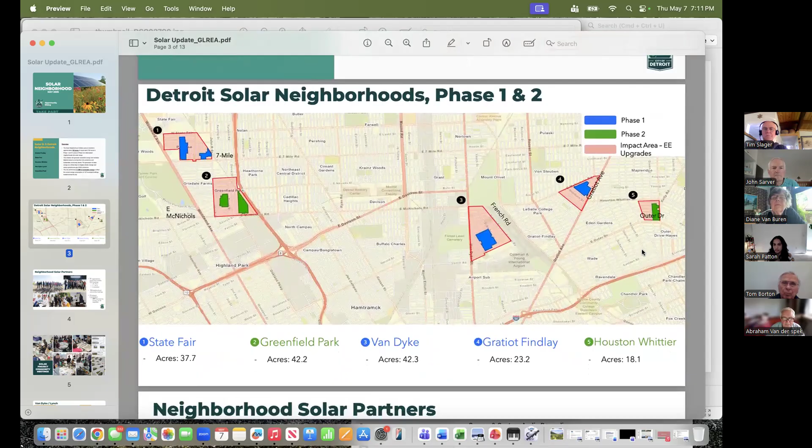Okay, Diane, can you move to that map, please? Thank you. So this is an overview of where all these neighborhoods are landing across Detroit. It's really fun to see it this way. The blue is phase 1 because we did this in 2 phases, and then the green is phase 2. Phase 1 happened in July 2024, and then phase 2 happened January 2025.

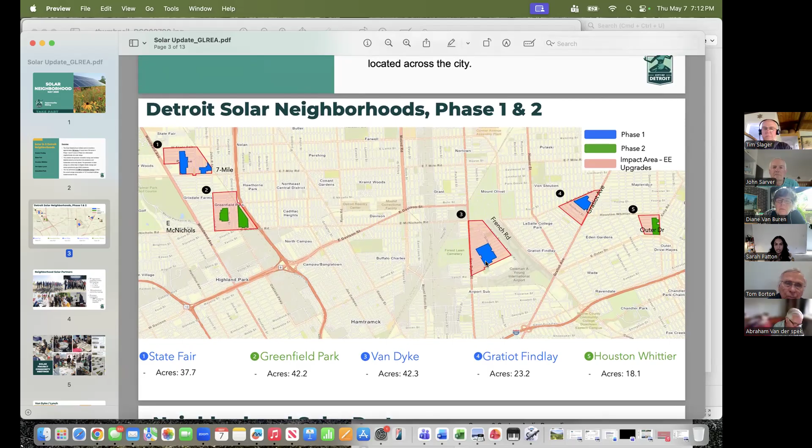How this map reads is the blue/green areas are where the solar fields will actually be. The red boundary is the surrounding neighborhoods that actually received energy efficiency upgrades. Because the generation is going towards city buildings, we really needed a way to give back to the neighborhoods, the people who are going to be around the areas. So as part of the initiative, we did home energy efficiency upgrades to all the surrounding houses within that red boundary. They got between 15 and 25,000 per home to upgrade their house. I'll go into detail a bit later on that.

So during this process, we had to engage the community, we had to engage our local organizations, we had to really drive home what this project was doing, how we were going to go about it. And as Diane said, we had to gain the trust of the neighborhoods. So we had 21 organizations join us, NSP's Neighborhood Solar Partners, and that is where Diane comes in.

She worked very closely with us on 2 neighborhoods. Of those 21, 10 of them were tier 1, so they just kind of helped us with messaging and getting out there. 5 of them were tier 2, so those were the partners more hands-on with the neighborhood.

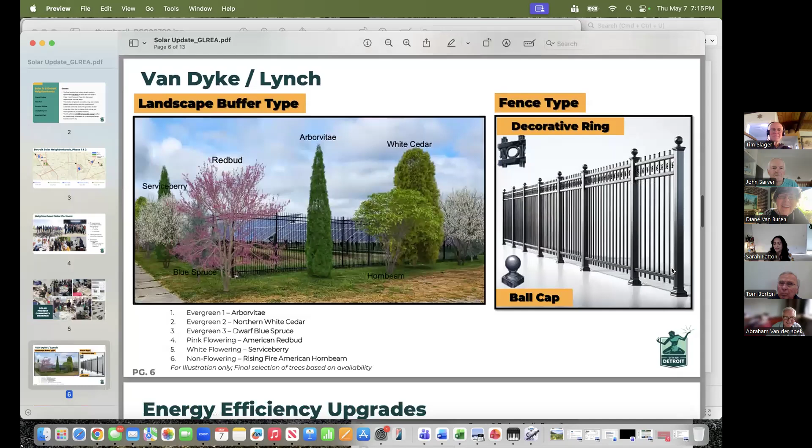And everyone ate well too. And everyone did eat well too. Yes, they were work time or after work time meetings, so we had made sure to have dinner.

And this is an example of what the neighborhood in Van Dyke Lynch picked. So they wanted the decorative ring at the top. They wanted a ball cap on top of the fence. These are the specific trees they wanted. That's how detailed it got. They picked the exact trees they wanted to see and even the order they wanted to see it in.

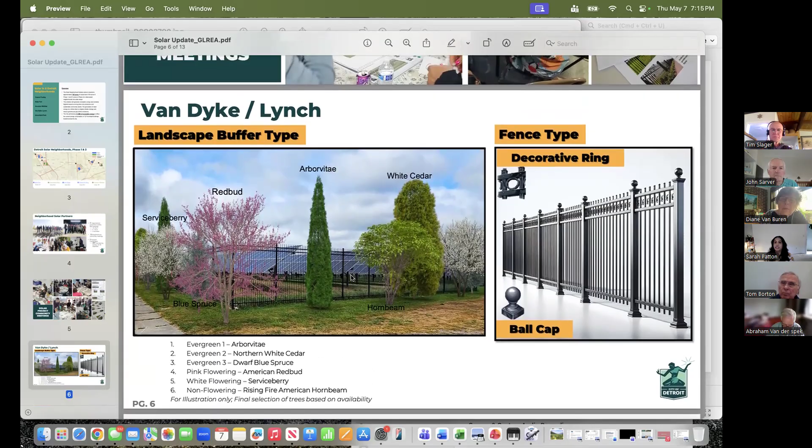So this is what the neighbors picked in Van Dyke. And I only put 1 image in here because it gets a little repetitive, but each neighborhood picked their own variation of this. So they're all slightly different, but the idea is the same, the same kind of fencing, but one may not have the decorative fence or they may not have a ball cap.

So this is what Van Dyke looks like, and in a few months, towards the end of the summer, it's going to look a variation of this. It's not going to be in full bloom like this because it's all going to be new plantings of trees and bushes, but give it a couple of years and it'll be full grown.

One other thing that they were able to select, and this is something that will be coming up, not in this discussion, but we'll host another one when this project comes up, and that was what type of interior, what did they want to see inside the fence? Sarah, I hope it's okay that I butt in here.

But what was important was the lesson learned from the first DTE installation in Detroit that was not a community engagement process. And then it just ended up being mowed grass, more or less. And the residents just felt isolated from that site, like this giant thing was put in the middle of their neighborhood. And what do we do? So it was really critical that the neighbors had a voice in what they wanted to look at.

In the Van Dyke Lynch neighborhood, which will be called a different name shortly by DTE, they wanted a meadow inside. So they had options: do you want gravel, do you want just mowed lawn, do you want agrivoltaics? We did one of our solar talks last year on agrivoltaics. This neighborhood really just wanted the meadow and they liked the look of the wildflowers and whatnot. Recognizing that meadow doesn't look like that year round, there will be border plantings as well around the edges.

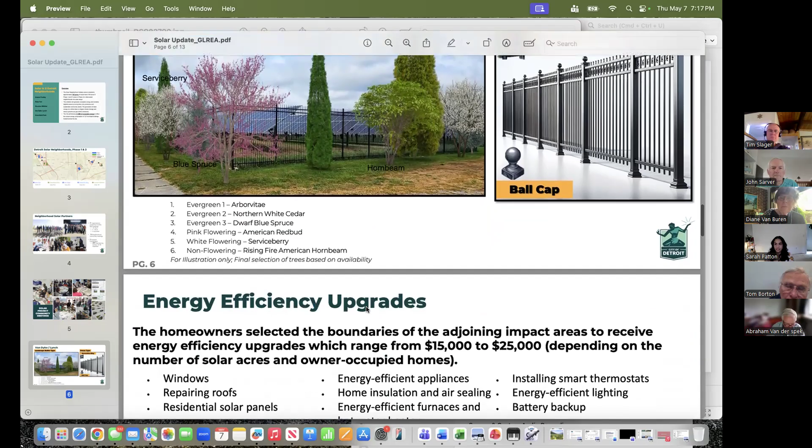I do want to stress that we learned a lot of lessons from O'Shea Solar Park. While the residents did receive some home upgrades, it wasn't nearly the way we touched them for these five neighborhoods. We made sure it was community driven in these neighborhoods, which is why they had so much of a say in what it looked like.

They also had these energy efficiency upgrades, which I mentioned earlier. It's 15 to 25,000 dollars, each neighborhood has an allocated amount. How it was determined was depending on how big the array in that neighborhood was, plus how many homeowners. It was just like a formula of how much.

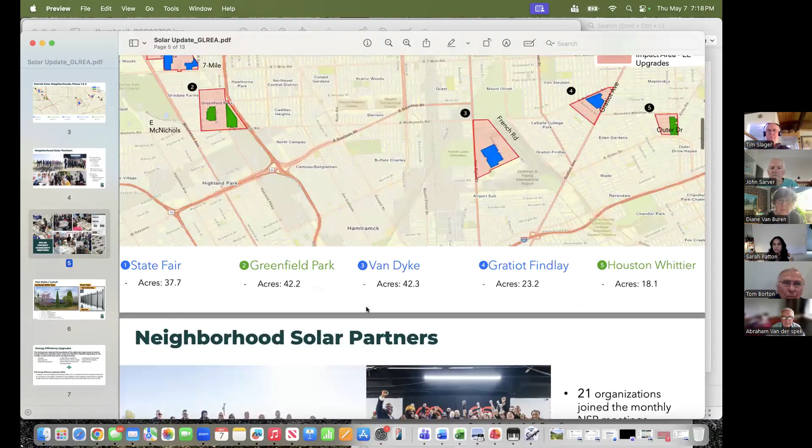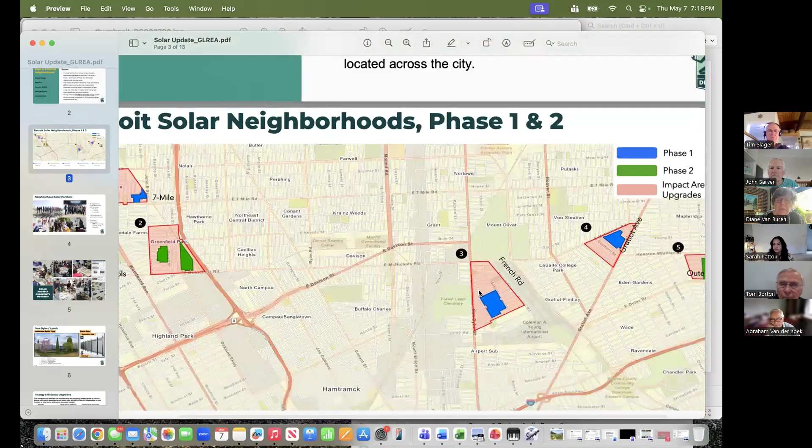As you can see, for Van Dyke, this is about 40 acres, and the residents in the pink area - 65 surrounding homeowners. So that neighborhood specifically received 15,000 in upgrades.

The process we did was we initially did a pre-screening with them. It was just a phone call to get their information, see what their concerns in that house was, collect data we needed. We needed to make sure they were owner occupied because that was a huge thing - no landlords were going to get these benefits. You had to own and occupy your house, and you had to have lived in it by December 2023, and that's all you need to qualify. You just had to live in the house.

We then did an inspection of the house. The developers had their subcontractors go out. It was about a 3-hour inspection where they looked at every corner of the house and then provided a report of where they think that homeowner can see energy efficiencies, and of course any health and safety measures that may have been concerning.

So this is just a list of their options. However, it really is homeowner driven, so that homeowner got a heavy say in what they received, but they could have gotten windows, roof repairs or replacements, solar panels, which I will show you. We did have one resident whose house was solar ready, so they were able to get panels, appliances, furnace, AC, hot water heaters, CO detectors - anything that was going to make the house more comfortable to live in, and obviously lessen their energy burden.

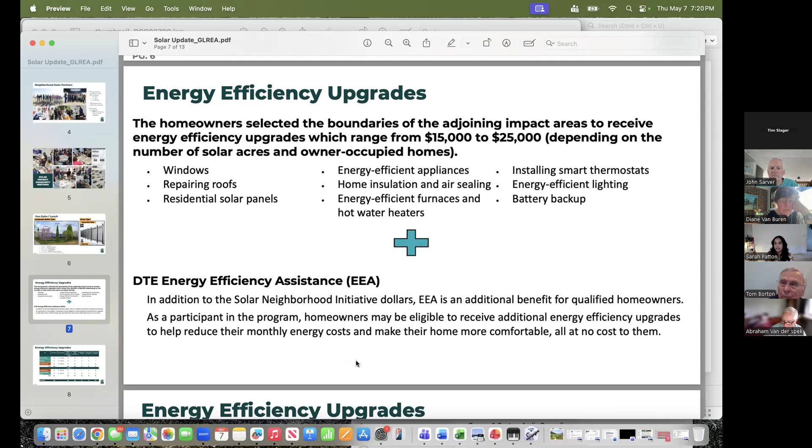We coupled this amazingly - DTE was a great partner with DTE's EEA program. So above the 15 to 25,000, the homeowners also received EEA, and that was just whatever additional benefit DTE could provide.

This is a snapshot of where we were about a week ago. As you can see, we have 209 total homeowners. That's the breakdown of what each neighborhood received: Gratiot Findlay about 17,000, State Fair and Greenfield Park is 25,000, and Van Dyke and Houston Whittier is 15,000 each. So each home received that dollar amount, but in addition to that, they also received EEA dollars.

As of last week, we've actually completed about 100 homes - I think it's a few more as of today - but that very last column shows how many homes are completed of the 209. About 85 are kind of in progress right now. The homeowner has either signed off on what scope of work they want, so what upgrades they're receiving, or they are actively in construction. The remainder is just us collecting final paperwork and getting on their schedules for when we can do their home assessment.

So pretty soon this is going to be a completed list, and all these homes would have seen great upgrades in their house. We've seen so many new roofs, so many new furnaces and ACs. We've gotten a lot of testaments of how their house is now so much more comfortable to live in.

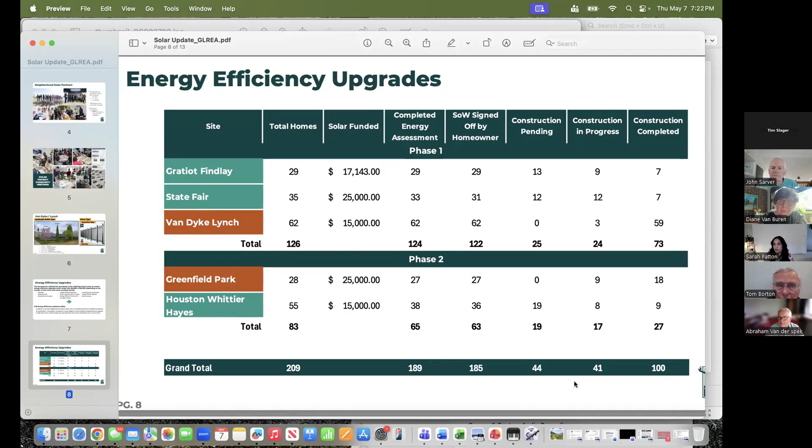We had one instance of a resident who received a CO detector - there's actually an article out there if you want to look it up. But a few days after she received it, it started going off, and the fire department came to inspect the house. They told her had she gone to sleep that night, her and the kids in the house may not have woken up that day. If it wasn't for that CO detector getting put into the house, who knows how that story would have ended. But gladly they did get out and they were able to fix that problem. That's just one of many stories we've heard that we are so happy to have been able to make that difference in their lives.

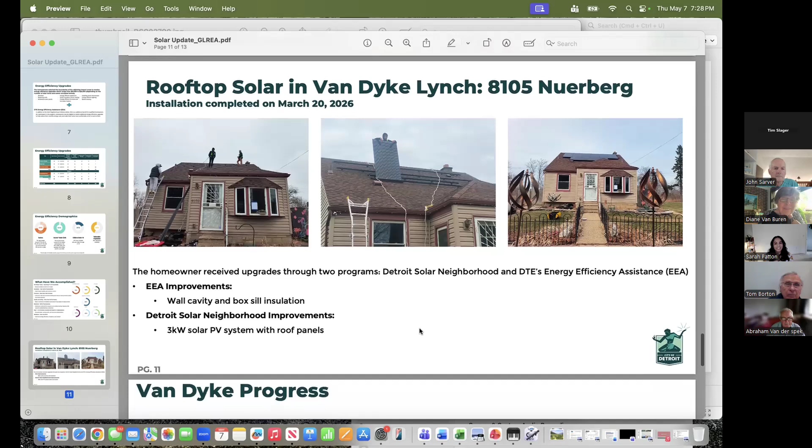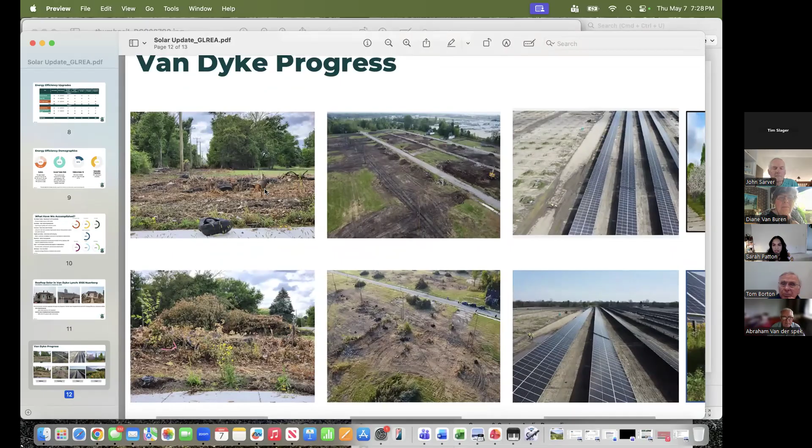Wow, isn't this something? I'm going to blow up the befores. That was a great photo you showed before. These are just additional images of what this land looked like. It was just nothing, there was dumping on it, it was overgrown. This is a sidewalk view of what you would see walking by. So this was before we purchased the land. These were the neighborhoods looking like.

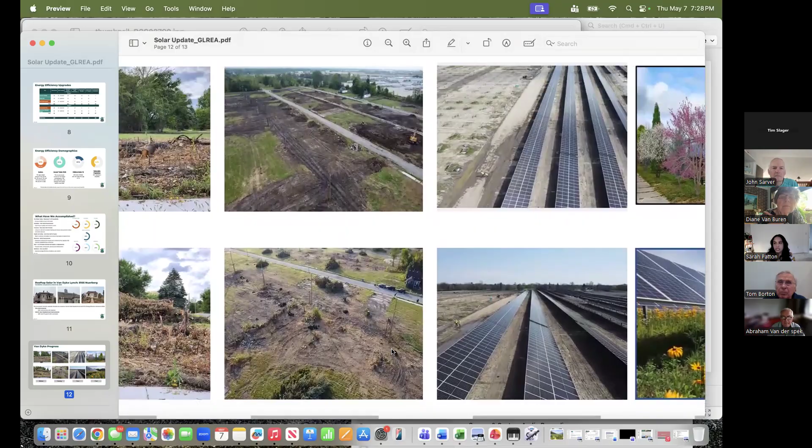Then there was a during, when of us clearing the land. The city at this point bought the homes, demolished them, and DTE started clearing the land. That third column is what it looked like as of last week. So it's coming along fantastically. You see panels in the ground. Pretty soon you're going to see that meadow pictured on the very right hand side.

But just to get a scale, okay - here's 2 guys, right, and then here's a house over here. So this extends for several city blocks both ways.

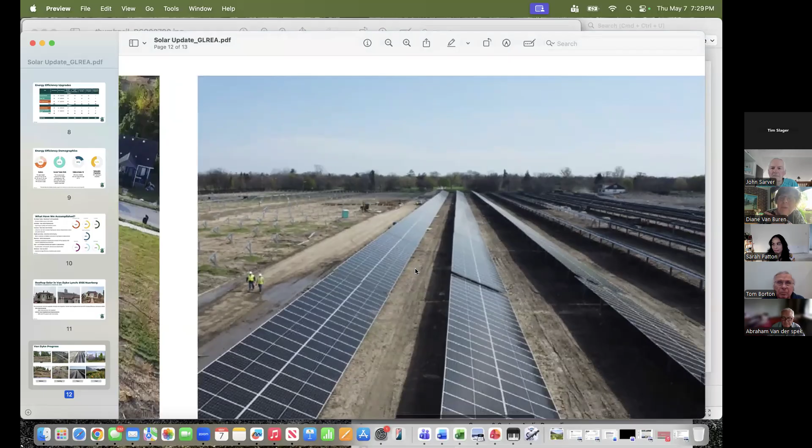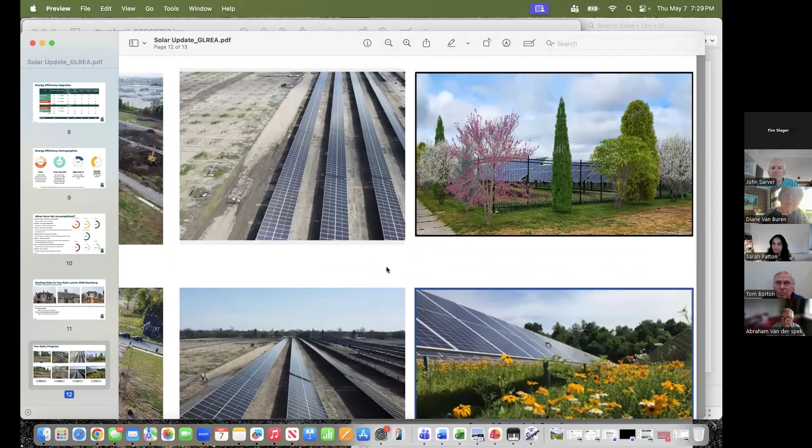And Terrence and Brandon are going to be bringing us up to speed on that. And then here we are with the meadows eventually. I think we're going to talk to them about how to group the red buds together and make groupings, but we'll get there. And then a beautiful site.

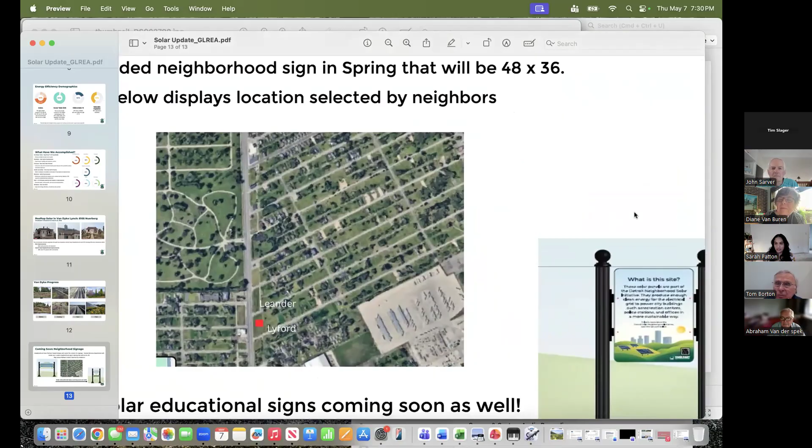One additional piece we found some money for that's really exciting is neighborhood signage. There's going to be 2 signs. The first sign - Van Dyke, for instance, DTE refers to as Castle Park - but it's going to be a solar neighborhood sign saying this is a solar neighborhood, and it's going to say the neighborhood name, so Van Dyke for instance. We're also going to have an educational sign on what solar is, explaining as people are walking on the sidewalk what they're looking at through the fence. That middle picture - I wish there was better pixelation on it - is actually where Van Dyke specifically will be located.

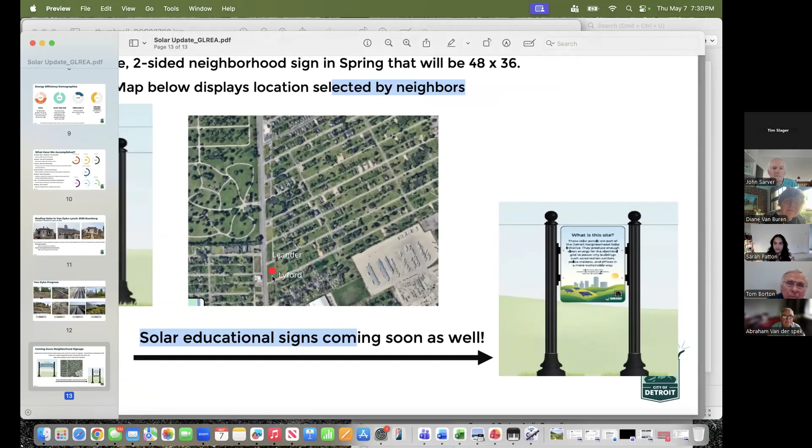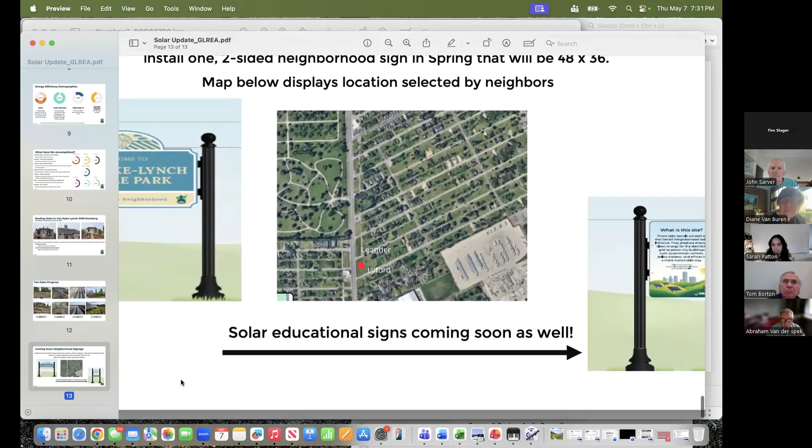And again, this was heavily neighborhood driven. This is where the neighbors in Van Dyke voted for these signs to go, off of Leander and Lyford, right in the middle there. Again, just right off the sidewalk, so anyone walking by can stop and see the sign and read the educational piece. We're hoping the city's going to be putting these in now that the weather's a little bit better, we should be putting it in soon. The other neighborhoods still have to vote on where they'd like the placement, but once they do, the signs in the other neighborhoods will go in shortly.

That's awesome, that's all I have to present. It's a lot of information, feel free to ask questions towards the end.

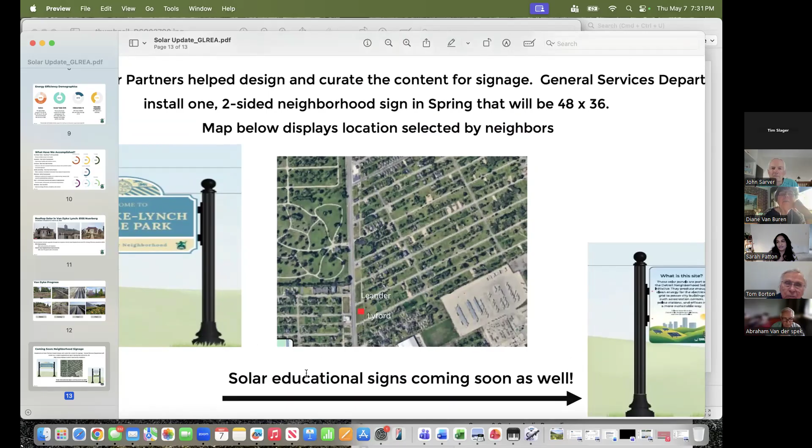Let's stop for a moment and see if there's any questions for Sarah directly now. Before we move on, I have a technical question. Hold on, I've got John Freeman's hand up. Oh wait, go ahead Marcia. Go ahead, oh thank you.

That was fascinating, but I have a lot of questions about how this is being financed. I don't know who owns the solar panels, what organization, that sort of thing.

I didn't catch what you said, I missed it. I'm sorry, that's a great question. I did not go into that much detail.

So how this is working is the city owns the land and the developers are leasing that land from us. So they actually own the solar panels.

How it's being financed: right now the developers are DTE and Lightstar Renewables. They were selected through an RFP process. The city put out an RFP two years ago to solar developers nationwide to select a developer who could come up with a financial structure on how to best make this work.

The city said, give us your best ideas. We're willing to lease, we're willing to outright purchase, you tell us what will work best. The city did select DTE and another company out of Boston, I believe Lightstar, that's doing the agrivoltaics.

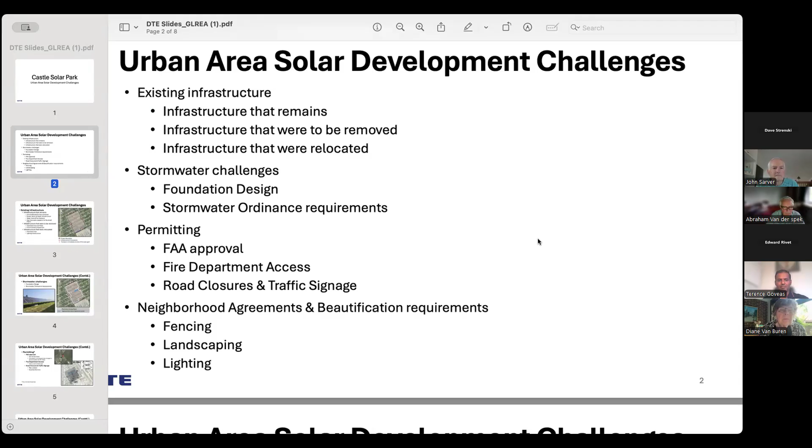So we can go to the next slide. Yeah, thank you, Dan. So in an urban site, compared to a greenfield development, the first big difference is that the project area is surrounded by and often interwoven with existing features and community uses.

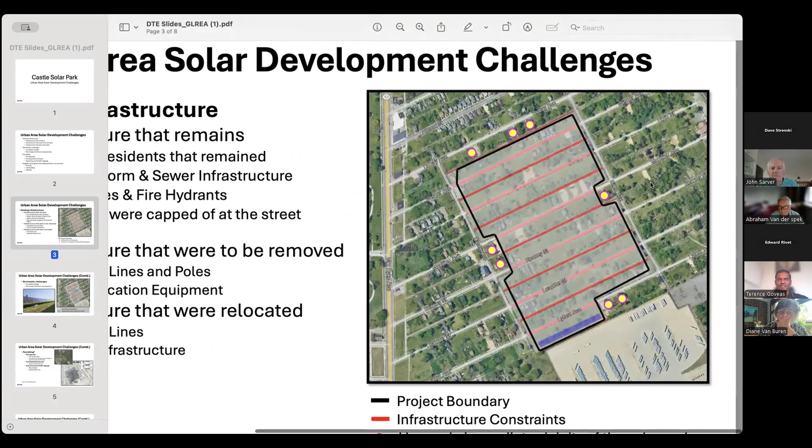The image you see here on the right-hand side is the project location. The black line shows the project boundary. To the east of the site is an airport. I should have thought about that before. On the west side, you'll see that main street is Van Dyke Lynch, and what Diane was pointing out earlier is Castle Avenue.

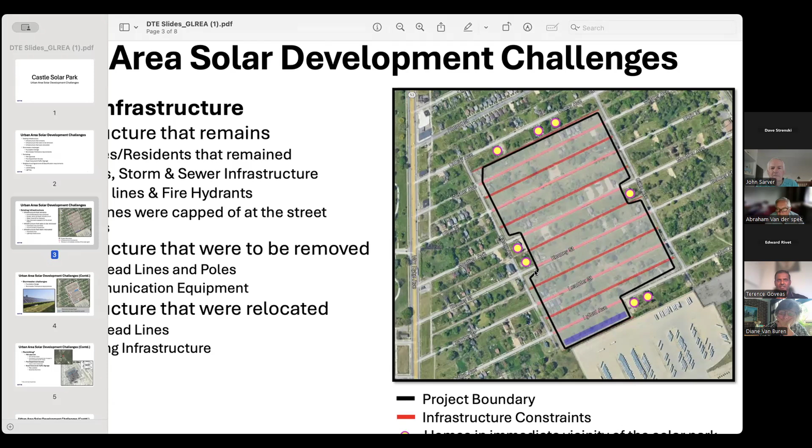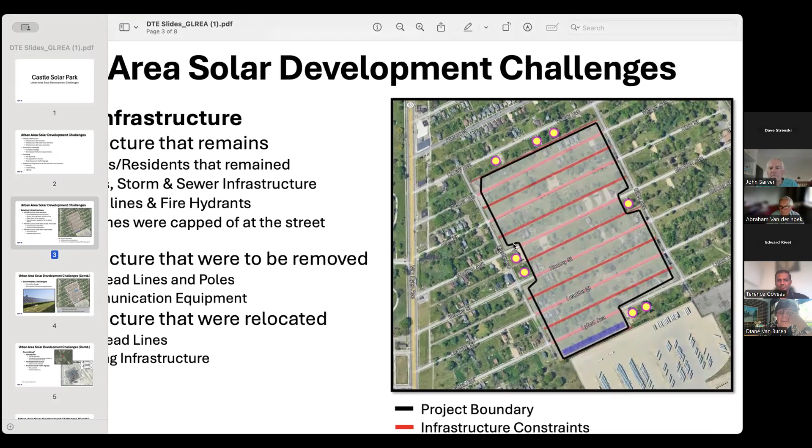So the first thing we did was look at the infrastructure and figure out what remains. Obviously we decided the roads had to remain. In addition to the homes, the stormwater and sewer infrastructure had to remain, and the water lines and fire hydrants had to remain.

Now, per our contract with the city, we were allowed inside the fence to build on top of the streets. They just had to be ballasted, so in case maintenance was required we'd be able to dismantle the system and do the required maintenance. But we decided against that, because when you look at the long-term feasibility, dismantling an operational power plant does not really work out quite well.

So the red lines that you see within the maps are essentially these stormwater lines and roads that we decided to stay out of.

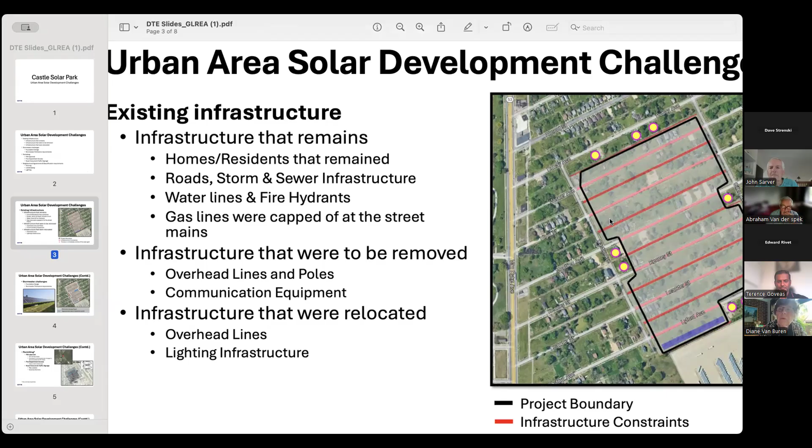And Terence, it should be pointed out quickly that DTE has a 35-year lease. So it could be that in 35 years this neighborhood is hopping, and it could be a housing development that happens at some point, or there could be another use. So the city, to save costs, chose not to have that amount of infrastructure removed. That's a very good point, Diane. Yes, so we decided that all of this infrastructure would stay in place.

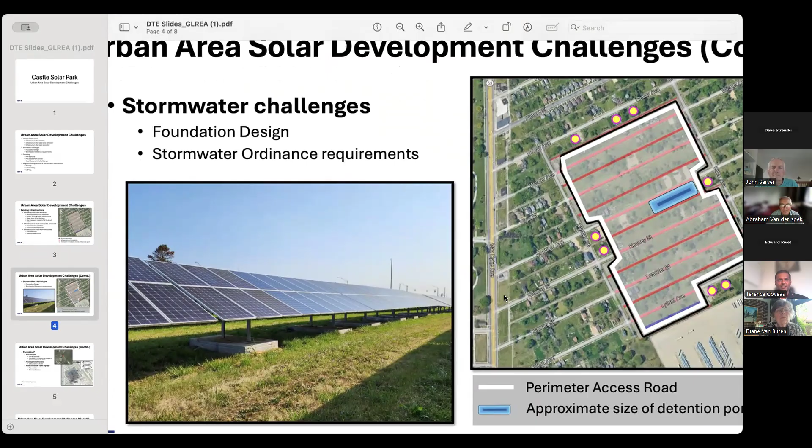Then we had to look at what would be removed: the overhead lines and poles. Some of these poles had communication equipment from either AT&T or Comcast connected to them. And just because the solar layout and the long-term operations couldn't coexist in case of a storm and things like that, there is a high risk that our panels are damaged. So we decided those need to go away.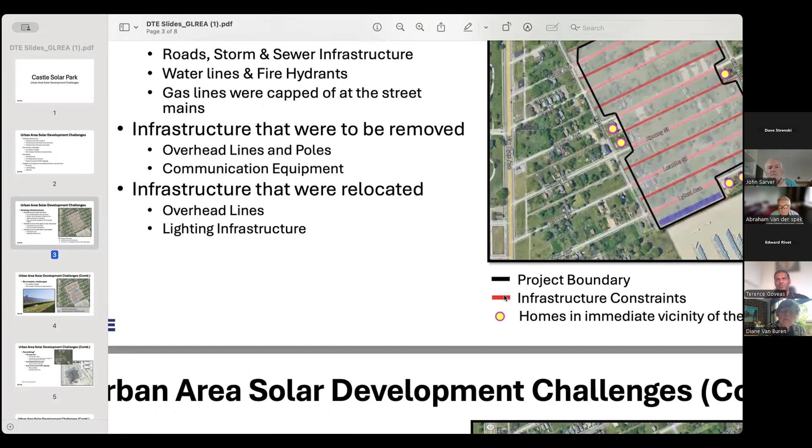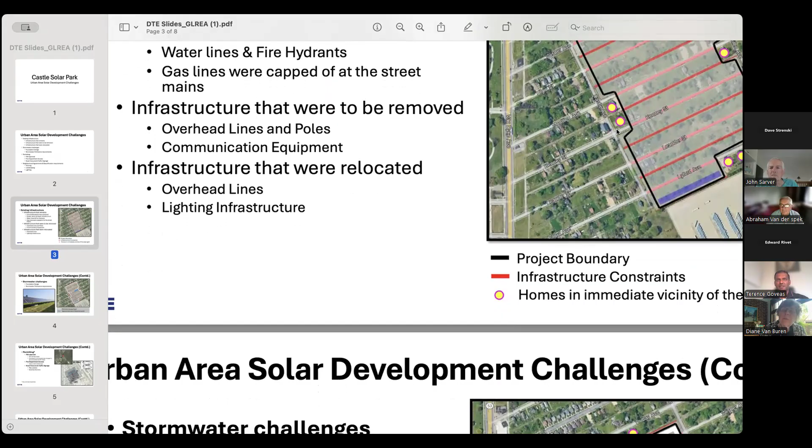And some overhead lines were relocated to the boundary, because you still have to power that one home on Gilboa Avenue. So some of the power lines were put along the perimeter on the north and east side. And I believe these houses chose to stay - they could have sold, and the yellow dots represent the houses that decided to stay.

So we would have liked to have a straight line fence there, but we had to build around that. Once you understand what the fixed constraints are, what you can't move, what you must move, and what you must protect, then you go on to the next big driver, which was the water and the stormwater challenges.

Stormwater directly influences the foundation design and the overall civil layout. For all practical purposes, a solar array is technically considered a pervious surface because water just runs off and there is a gap between the modules, so any rainwater can percolate directly to the ground. We had decided to go with a ballasted system.

While going through our designs and looking at the stormwater ordinance, we realized the amount of concrete blocks we were having meant the total area was beyond what the ordinance would allow without implementing mitigation measures. The ordinance is written such that if you exceed a certain acreage limit of concrete, you have to implement certain measures.

One of the options was to implement a detention pond. As you can see on the screen, the blue rectangle is the size of the detention pond that would be required for about 40 acres worth of developed area. That would mean we'd lose generation capacity and it would also mean additional civil work.

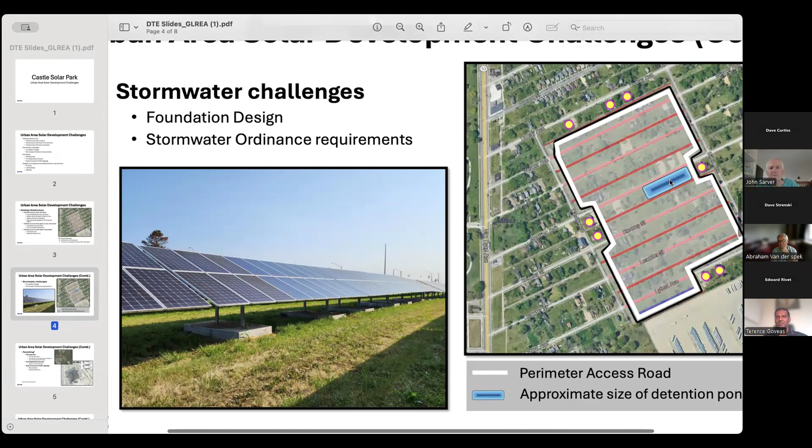We really didn't want to disturb too much of the land around there, and it would have meant additional costs too. Compared to a greenfield project, when you work within city limits, you don't really get the economies of scale. So taking all that into account, we decided to move away from ballasted foundations and instead went to a pile-driven foundation.

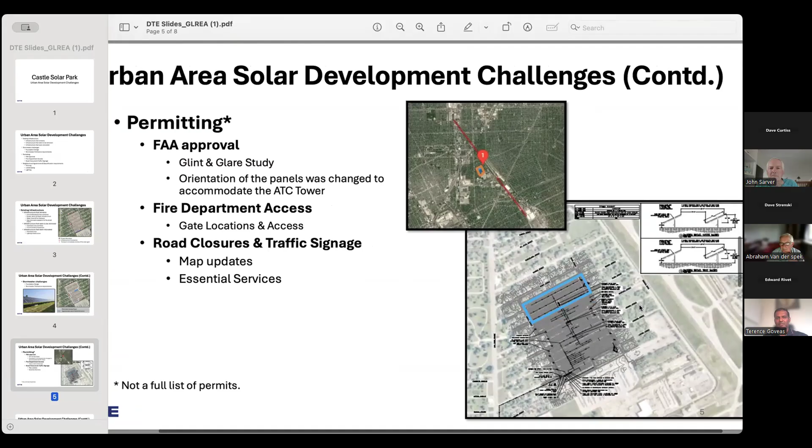Once the civil concept is workable, the next set of constraints really come from approvals, safety, access, and operating within the city limits. It so happened that we have an airport right next to the project site, so once we developed the initial design, we coordinated with the airport development team.

A glint and glare study was performed. This study incorporates technical details from the design, like the type of panels, the angles, the orientation, and it also looks at the flight glide path and the air traffic control location. In this case, it turned out there was a slight impact to the air traffic control tower.

Based on the report, the top one-third of the array really was the problem area, so we had to change the orientation of those panels to face southwest. Most of the panels here are facing southeast, so just the northern side of those we had to change to southwest to mitigate those glare concerns.

Once that was figured out, we went to the PPR, preliminary plan review, with the city, and also got additional feedback from all of the departments.

The fire department gave us input into where the gate locations should be, in case of an emergency response. In addition, the city departments developed road closure maps and traffic signage that had to go with it, because even though this was in a corner, we were essentially creating dead ends at certain places, or we had to reroute traffic.

There were detour signs that needed to be placed along the project boundary, and Google Maps had to be updated for essential services like emergency response or trash pickup. Those had to be developed as well, so we worked hand in hand with the city to go through this.

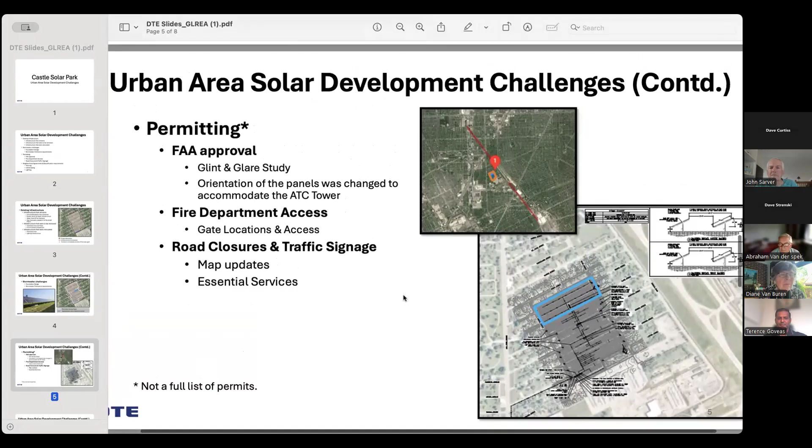Now, that doesn't make the task easy. Next slide. Yes, yep, yeah, but yeah, I would say we had a great time working with the city. Everybody was helpful, giving us useful suggestions on how to do things. It was an iterative process, and it was a pleasure working with all the departments there.

After you clear all these approvals and access requirements, the main layer really is the community expectations, which is what you see here—you've probably seen this slide for the third time now. This essentially captures the good neighbor requirements under beautification. In urban solar, aesthetics can be a core requirement, not just a nice to have, because the project exists in daily view of the residents. That's what Diane and Sarah pointed out earlier about O'Shea—they are looking at this site every morning as they wake up, and every evening before they go to bed.

So we really worked with these communities to understand what their requirements and expectations were. It was pointed out earlier, they chose the type of fence with the ball top post caps and O-rings, and the type of trees.

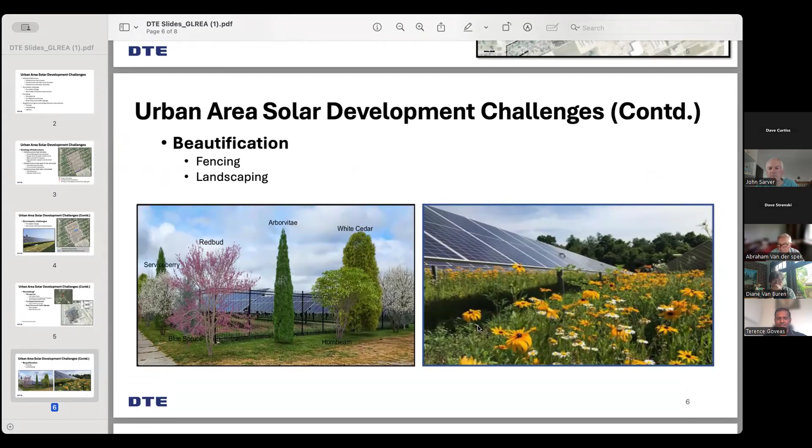On the right hand side, the image is essentially a rendering, a visual that reinforces the intent. The plantings are all planned. There's a mix, they wanted a meadow, a manicured meadow, so these seed mixes include Golden Alexander, Black-eyed Susan, Mountain Mint, and others. That was one of the key requirements.

So with that, I'll hand it over to Brandon, and he can walk you through the construction challenges. Thank you, Terence, great job. My name's Brandon Francis, I'm the project manager for the construction aspect of this. Once we get through design, Terence hands it off to me, and we take it from there.

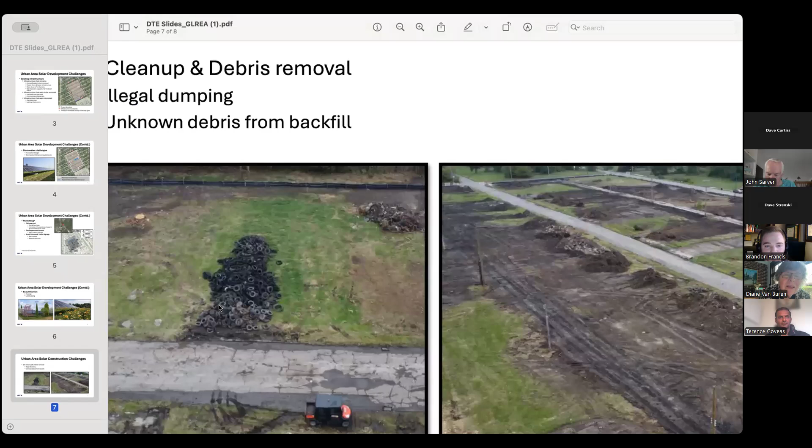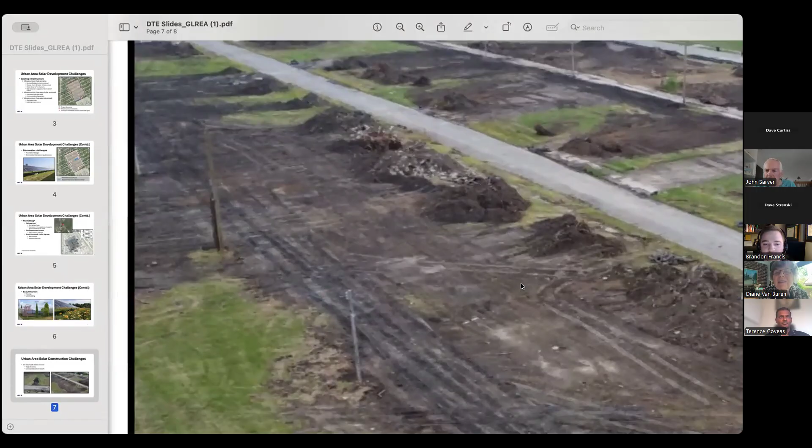We began construction in January with a lot of our pile installation. We actually started before that with tree clearing. Once we cleared a lot of this area, there was a lot of debris left, tires and all. There was concrete, asphalt, trash, lots of tires and things like that piled up and assembled. Cleaning the site was a pretty large task, but we were ultimately able to clean it all up and move on from that.

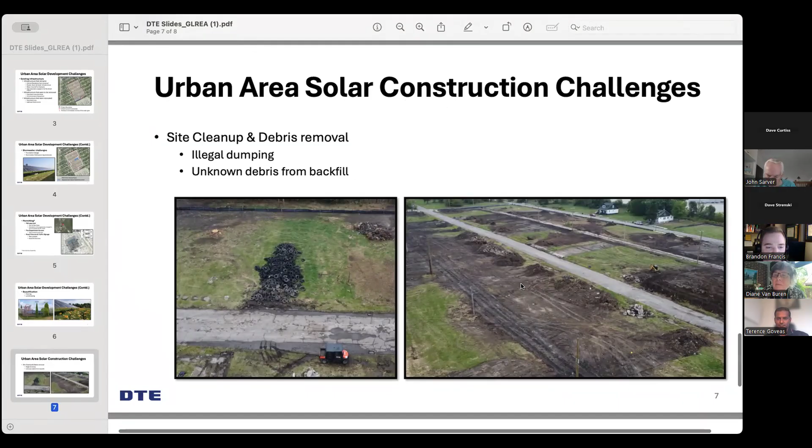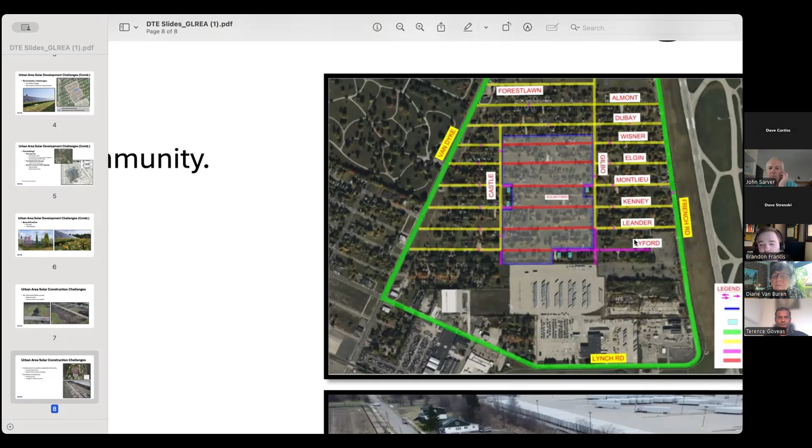So some of the construction challenges we're working through: we had a transportation plan to limit disturbance to the residents that chose to remain and the folks in the vicinity around the project. We had this green line here, which is Lynch Road. We had folks come up and around French Road, then through some side streets on the northeast side of the project to get into the job, especially all of our trucking bringing in the glass modules, the solar panels, following those routes to limit disturbance.

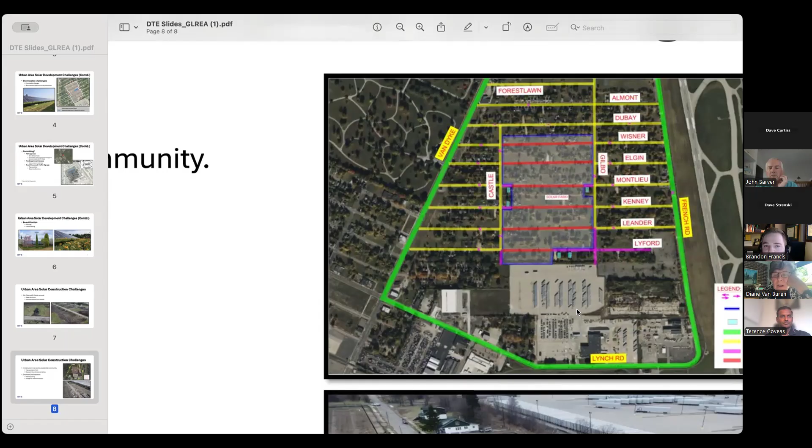Let's see what else we had. Is this your staging area here? No, that's a Stellantis plant. Then here you see the airport runway, and it forms an L shape and comes down and goes east and west, just south of French Road or Lynch Road there. So this is Lynch Road, the southern boundary. Or that is Lyford Avenue, on the south part of the job, above the project.

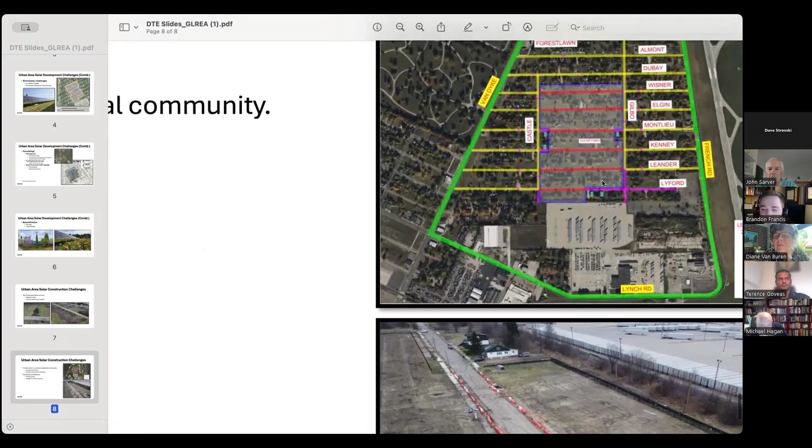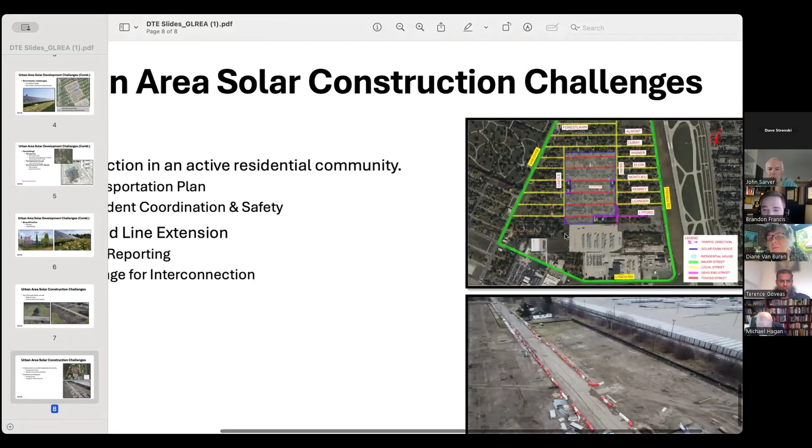This picture shows that we had those two residents there that remained, so we have construction barricades and things like that to make the project safe. We cordoned off this area so the folks could still get through, and our contractors were great in helping us make that a safe space for the residents to travel. The city was helpful in communicating to the residents and working through that.

So are those two going to stay, or do you think they'll eventually move? I think Sarah could speak to that more, but I believe they're actively in the works of moving out because we do have a fence that goes right across the road there now, so they cannot go that way anymore.

As far as additional challenges, there's the overhead line extension. At Van Dyke and Lynch, we have our existing 24 kV subtransmission line that runs east and west. We need to bring those power lines to the site so we can tie into the plant, and all the energy we generate will go onto those lines and out to the grid.

So we actually do not have a substation per se. We have inverters and transformers and lots of equipment. We have some equipment pads, but we're putting the load onto the existing 24 kV system.

Part of that requires three different permits. We need an MDOT permit on Van Dyke, a City of Detroit permit, and an FAA submission. It's not so much a permit, but we have to submit paperwork showing what we want to do because we're penetrating that airspace, within I believe 10 or 20,000 feet of the airport. MDOT also has an aeronautical division looking at the 80 and 85 foot steel power lines we need to put in this area.

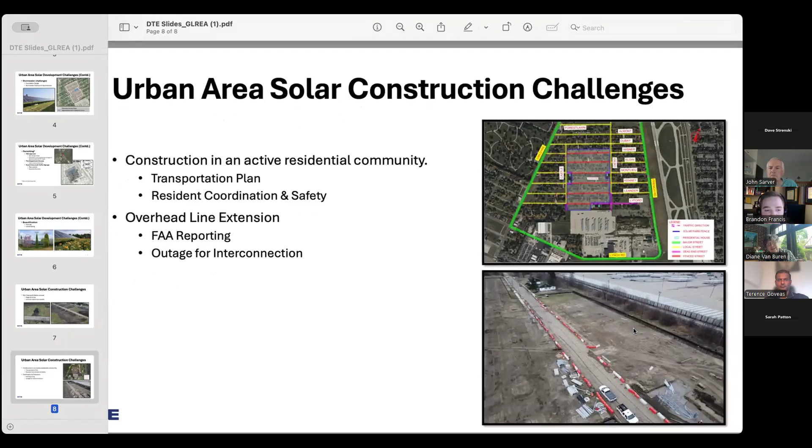I believe those were really the main challenges we've had from a construction standpoint. Construction overall is moving really well on this project, and we plan to be mechanically complete in the next couple of months. So things are going pretty well.

That's why I'm saying it's so amazing how quickly this project is going, because of challenges that weren't totally unforeseen, but when you see the picture of all the solar panels, you realize no, there were houses there and basements under those houses, and there's just so many complications because of the urban site.

So you'll definitely be writing the book on how to do urban infill solar installations for the future, especially at the 40 acre scale, because it's huge for inside a city.